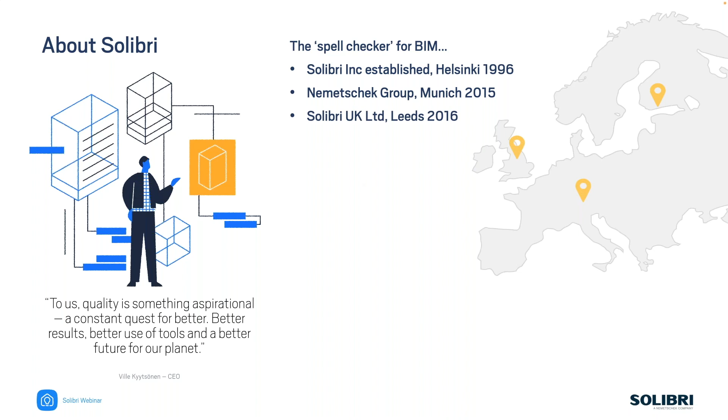In terms of the background of the company, Solibri, the main company that started it all off way back last century, is based in Helsinki. We became part of the Nemetschek group in 2015, and specifically the UK here, we became a full-on subsidiary in 2016, although we existed as an entity before then. Our head office is Helsinki, our UK office is Leeds, and as you'll probably be able to tell from our accents, myself and Simon, we're not from Yorkshire, but we are dotted about as an organisation all over the place.

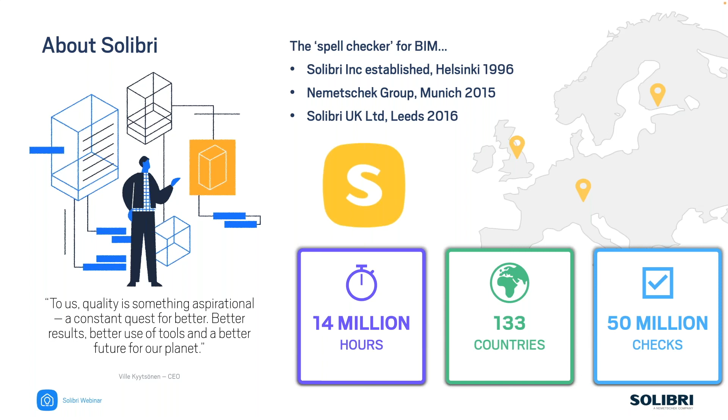Some of the basic stats: we're on track for an estimated 14 million hours usage of Solibri Office this year. Because we use a cloud licensing system, we know from those statistics that the software is in use in 133 countries, and we're estimating something like 50 million checks to be carried out. So there's some fairly big numbers.

In terms of the product family, we talk about Solibri. There is only one piece of software called Solibri. The license that you have, whether it's a subscription, a solo, a Teams, a network license, whatever it is, determines what you can actually use, whether that's Solibri Office, Solibri Site, or if it's the viewer, which is just the Anywhere product. Today, because of what we're going to be looking at, we're specifically focusing on how we check models and how we customize rules, specifically for the fire stopping process. So for that, it is Solibri Office that we are talking about.

Just to set the scene of where this sits in the workflow: typical workflow in Solibri always starts with IFC, and typically what we do is bring those together, usually multiple IFCs, to combine and create a federated model. That creates our SMC project, and then the key stages here are we can take that project and organize it into the way we want it, whether that's through classifications or just physically coordinating the models in different ways. But what we come on to from that point is checking.

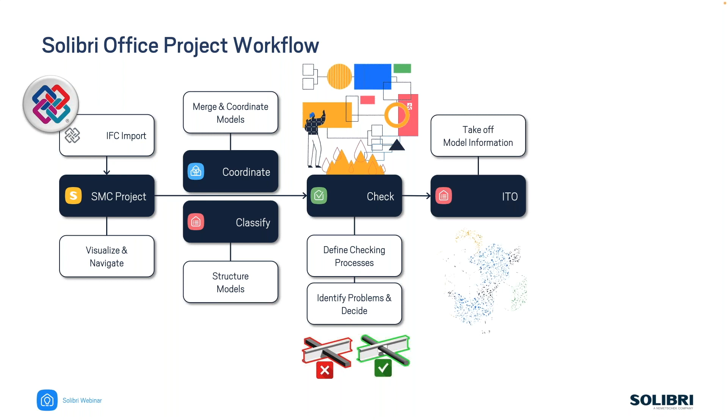We check what's in the model, and this is where we'll be focused today on the whole fire stopping side of things. So we want to identify any problems, decide what's going to be done with them, and then pass them on. Once we have a reliable model, then we can talk about information takeoff and how we can take data from the model. That's not really what we're looking at today, but the final stage is once we have checked the model and identified any issues, we have to communicate those.

So we need to share those with others, and typically what we're trying to do is do that with BCF, BIM Collaboration Format. It's an open source format, and the beauty of that is we can plug straight into most of the common authoring tools. That means we can quite quickly get some updated models returned, which plug back into the system and give us a nice closed loop so we can repeat this process, because we don't just do it once and have a finished model and everything's perfect.

Sadly, as I'm sure many of you will have experienced, it's never quite perfect. As I said though, today we are focused on this area here, which is the checking part of the process.

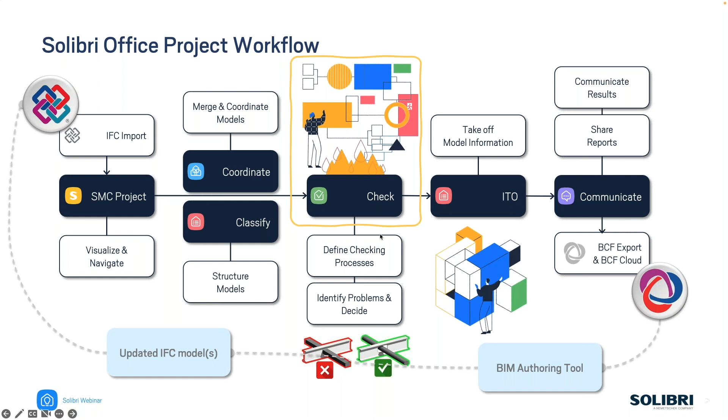So coming now on to the more specific stuff, the solutions and fire stopping side of things, we've developed a team in the UK looking at providing bespoke solutions. We have our own development team and we've partnered with strategic industry partners to create tailored solutions for Solibri. These range from simple things like checking names conform to ISO 19650, to creating custom checks like the stud opening check, which creates pseudo components to check things not normally possible since components aren't actually modeled. We can do detailed stuff like that, right up to complete projects such as this fire stopping project we're looking at here.

These solutions will be free to customers with a valid maintenance agreement, developed primarily for the UK but usable elsewhere with some tweaking for localized standards. What we're looking at today, fire stopping, is part of our BIM Coordination Plus library. The solutions we're developing fall into 5 main headings. BIM Coordination Plus will include the first couple of items, but we're also looking at others that are discipline specific or generic, regulations or standards like ISO 19650, and sustainability.

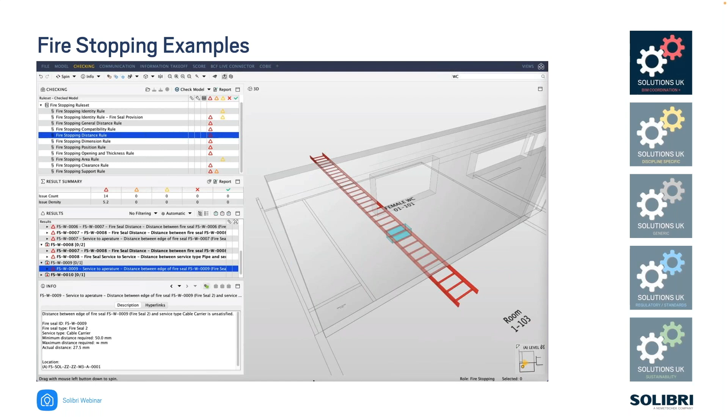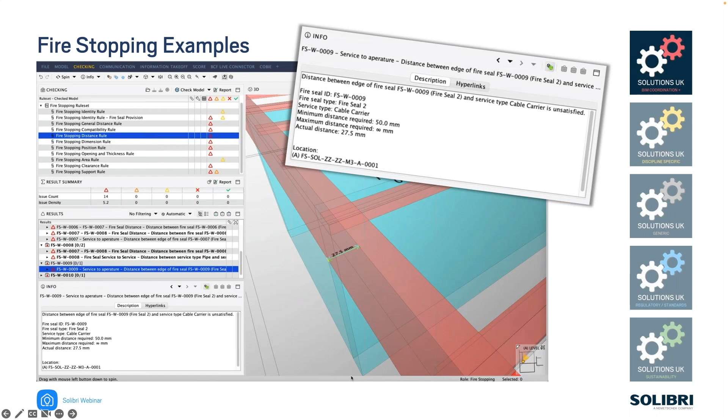Back to the fire stopping side of things as part of our BIM Coordination Plus, these are just some examples of what we can do. You can see we have the fire stopping rule set, and the results have been organised in a particular way. In this example we're looking at something that looks like a ladder - it's a cable tray. If we look closer, we can see that cable tray is actually too close to the edge of the opening it's passing through. Looking at the info itself, we've formatted this in a nice presentable way to make it clear what the actual problem is, and this can be reported off the back as well.

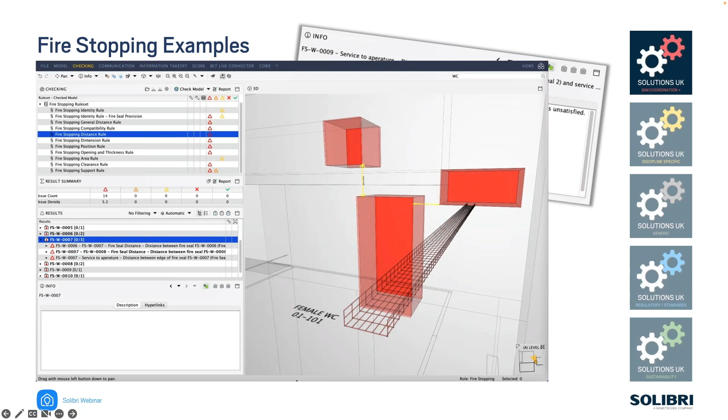Some other examples - you'll see we've broken these down and organised them by the fire seal instance ID, and what we can then do is present the various bits of info at the bottom. Simon will go into more detail on that. In this example we've also tried to group them together by this fire seal instance ID, just to give a logical approach to how we present that information. You can see all 3 issues are grouped into one item to make it easier to report and move on. But enough about me.

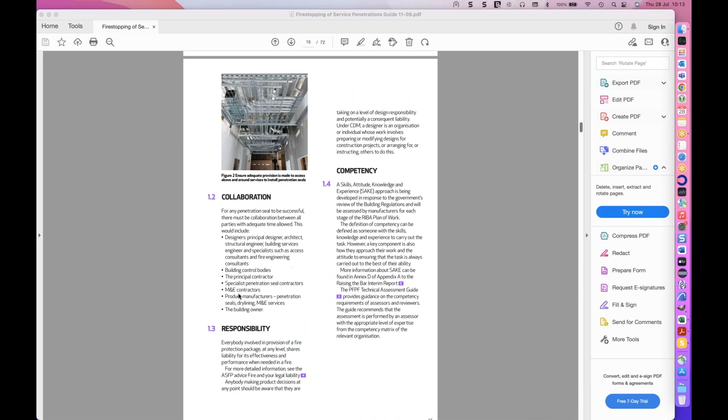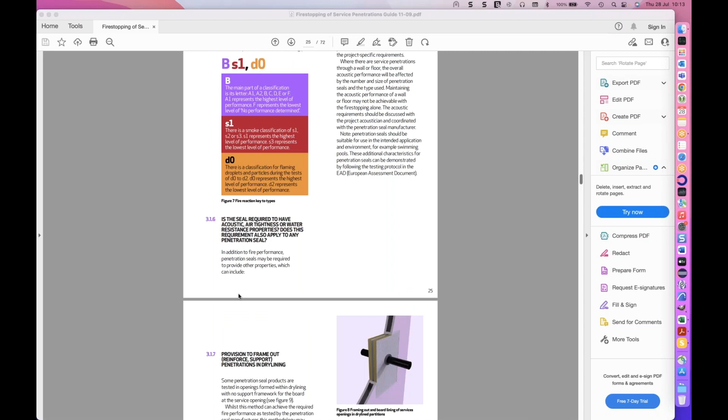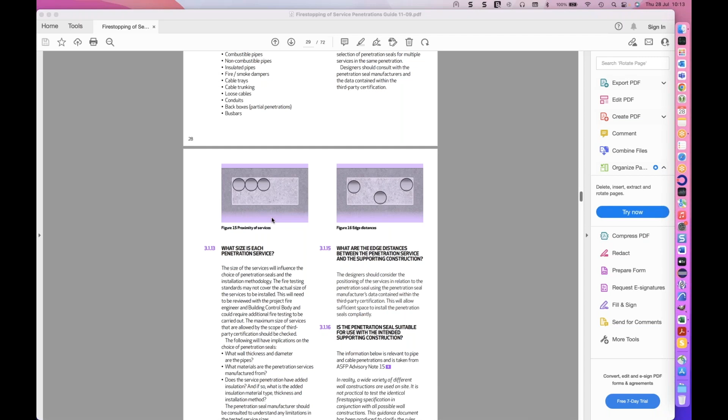Which is all about the spatial functionality for checking this. So it's looking at analyzing all the supporting construction, the positions and sizes of the penetration seals, the proximity to each other, and the positions of the services within those seals, either to the seal itself or to each other. That's the functionality we've been concentrating on.

So what I'll do now is close down the Acrobat Reader here. What we'll do is go into Solibri. I've just set up a ruleset with my fire stopping rule set, and I've got a couple of classifications that are used within the solution. So in here, I'm just going to open up my three models.

So the architectural model, a mechanical model, and a structural model. We'll open those up, and as good practice, as we always do, we'll give those short names so we can understand when we receive any kind of issues, we can see what components are from which models. I'll set those disciplines up so the rules can find the data correctly. So that's something relatively simple.

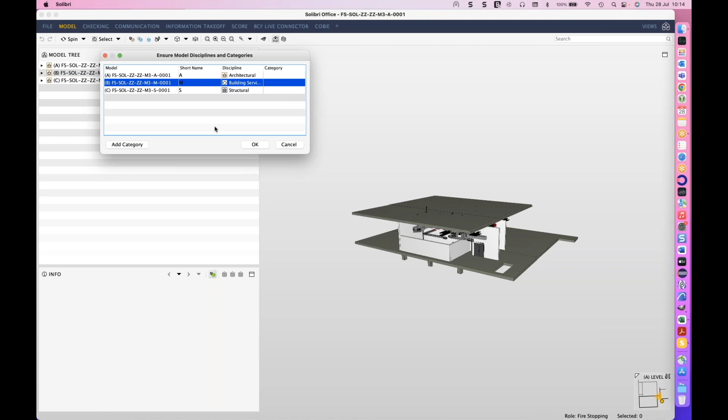So the model itself is just a very basic outline of a few walls, basically with some services going through them.

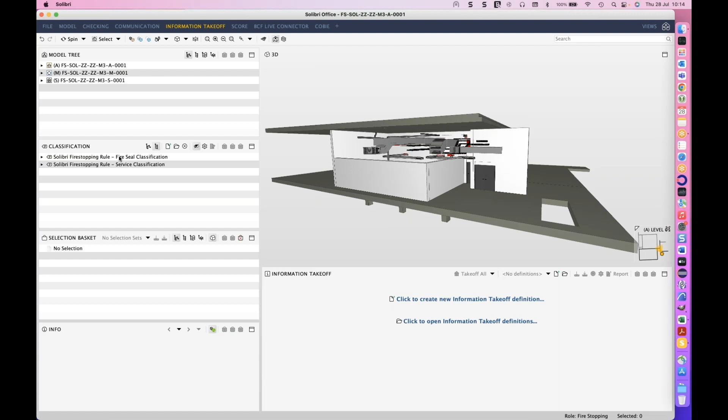If we go to the information takeoff tab, first of all, where the classification is generally found in the Solibri interface, we have two classifications which primarily drive the fire stopping solution. In this example they are very generic, but in real life scenarios they will be more granular. When we look at the fire seal classifications here, we can see we've got Fire Seals 1 and 2, done by position within the wall.

But realistically these fire seals, at an early stage, might just be the BWICs. At later stages they may be standard test condition IDs, such as for manufacturers like Rockwool and Hilti and those types of people. So I wouldn't expect to see Fire Seal 1 and 2 in here - I'd expect to see things like RW SW145 or whatever, the standard detailing reference for a particular condition. So in this situation, I'm just going to classify one of them slightly differently.

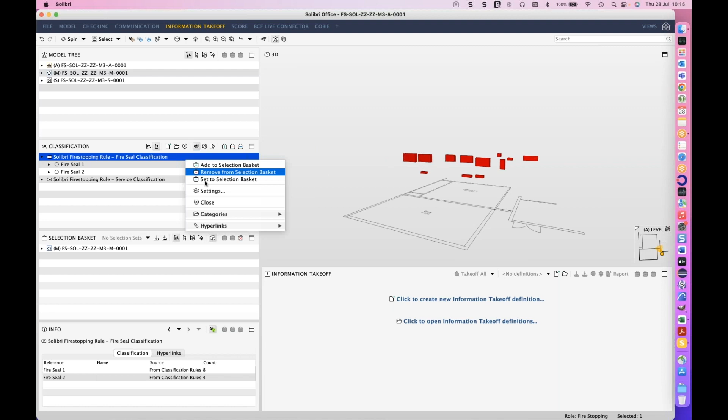I'm just going to set this up so we've got a Fire Seal 3 as well. So all I'm doing here is - let me just grab that a second - classified components, there we go. So we'll set this one to Fire Seal 3.

So now we've got these different classifications of fire seals. This controls basically the actual fire seals, the BWICs, or the openings in the model. We can run the vast majority of these rules based upon different stages of the project, and I'll come to that with the rules themselves.

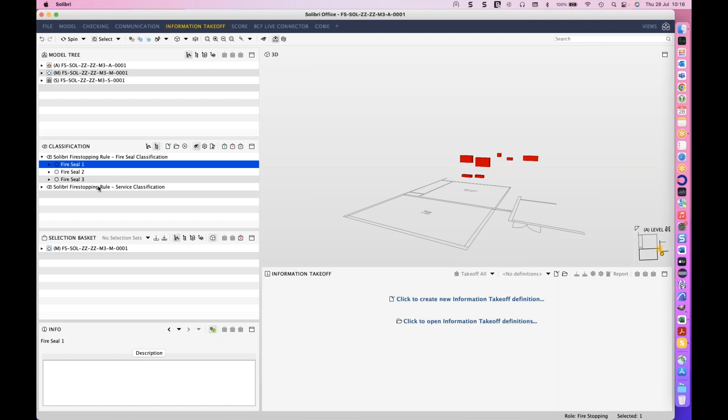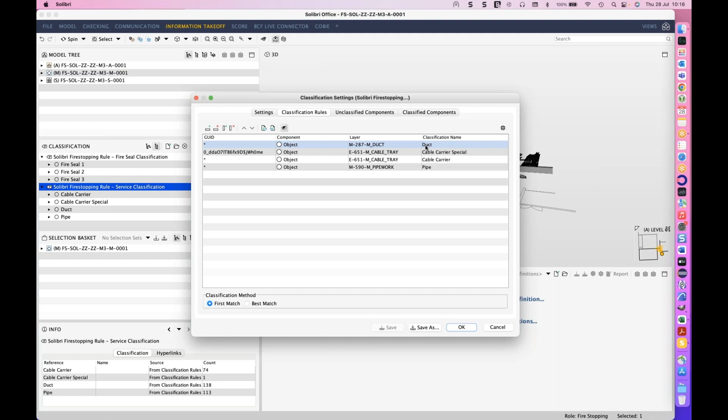The other part of it is a service classification, and I must stress here that what you'd expect to see is a categorization of things like copper pipes, plastic pipes less than 160 mil, or that type of thing. You'd use the relevant fields in the classification, such as pipe diameters, to classify the types of components as you'd expect them to be, so that when looking at the fire seal standard details, we can apply that through to the types of services as well. In this case it's just showing the functionality, but you'd break that down to a much higher degree of granularity.

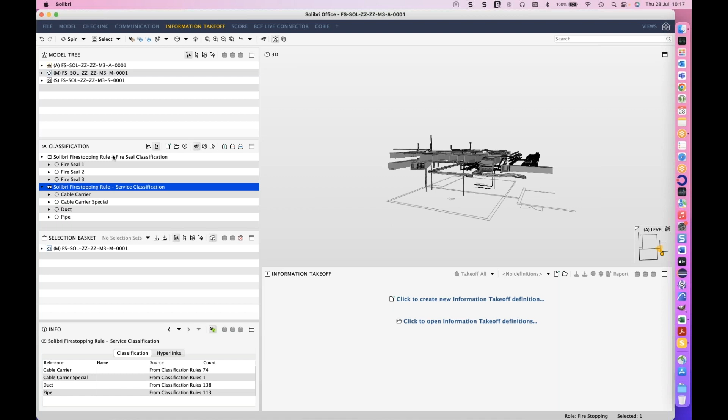So once we've got those two bits of data, what we've got in our checking area is a whole host of rules which enable us to step through the types of checks you might want to carry out when analyzing the fire stopping within a building.

The first one is really the identity rule, and the whole purpose of it is to identify where we have penetrations through compartmentation walls and floors. So let's run the check at the moment - we'll run it and let it go away and do its thing.

When we click on the identity rule, what it does is go through and you have to specify the walls and floors which are compartmentation walls and floors. Then we can specify a value here, which is floor distance, and I'll explain that in a minute. We can then specify whether to include any of the fire stopping services, defined as anything we've classified within this rule. So relatively simple filters really that are used within Solibri.

The floor distance is so that if we have panelized systems or elements that might have pseudo holes in them - for instance, if you're modeling in Revit and you had a panelized floor system and punched a hole in it by editing the objects, you'll find there's no physical voids there. There's a physical void, but not a void object that would clash with services. So we look at those panelized systems, and if they're grouped together or butted with gaps where services might go through, we look at a distance for another part of the floor, generate a pseudo object, and check whether the services penetrate through that.

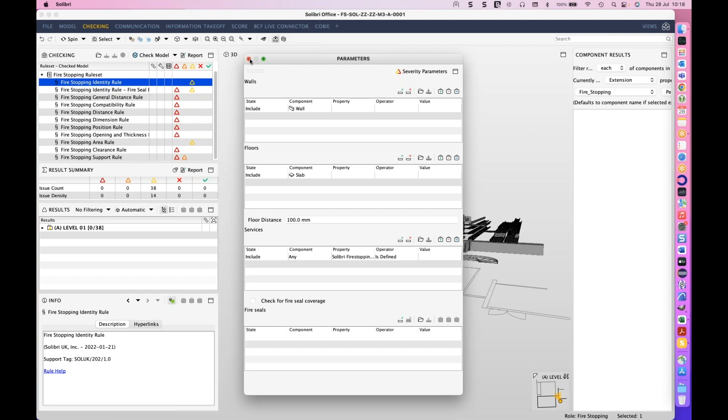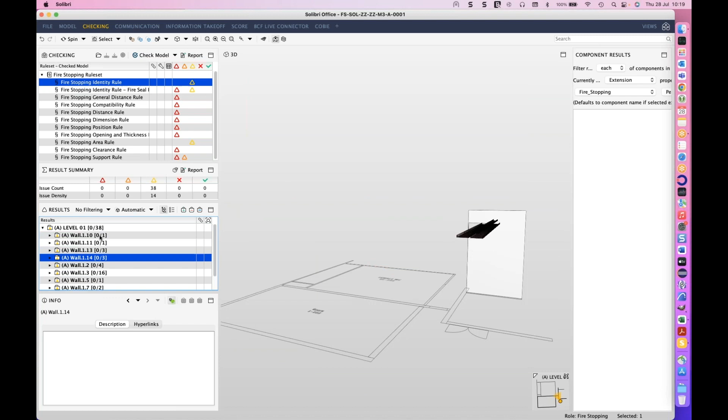We've done a lot of work here to make sure we don't miss any services - that's the key thing. The outcome of the rule shows by level the number of penetrations per wall type. So as we click on these walls, it shows us how many penetrations - we've got 3 in this one, 3 in that one, 4 in this wall, 16 in this one, and so on.

And when we get down to the slabs, you can see we've got 3 in that one. You can individually go into each of these items if you want to. The key part is if we go back to this wall with 16 items in it, we've also tried to keep the position of these relative to each of the services. What we don't want is for each issue, when you click on them, to jump from one side of the wall to the other. If we're planning BWICs in a model, we might want to start grouping them - you can see it steps through the wall based on its X position, so we're getting a more logical breakdown.

So for instance, if we've got these 2 pipes here and wanted to create a BWIC for it as an instruction, we could collate those 2 together and say these ones need a BWIC around them for planning purposes.

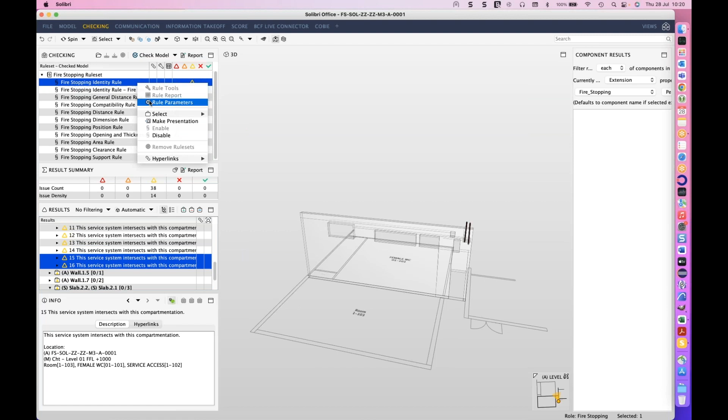Bear in mind this rule has another option, which is checking for fire seal coverage. This could be checking that you've got a BWIC assigned to these services, or the physical opening that's been punched into the walls or floors, or the actual fire stopping component we might want to check. At each stage, we could go and check whether there's a definition of those components in the model.

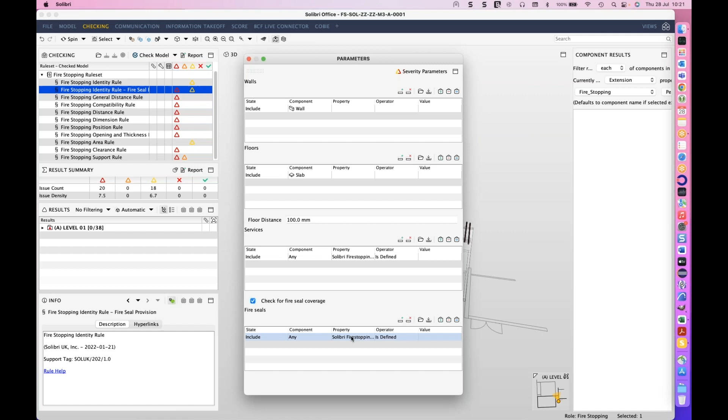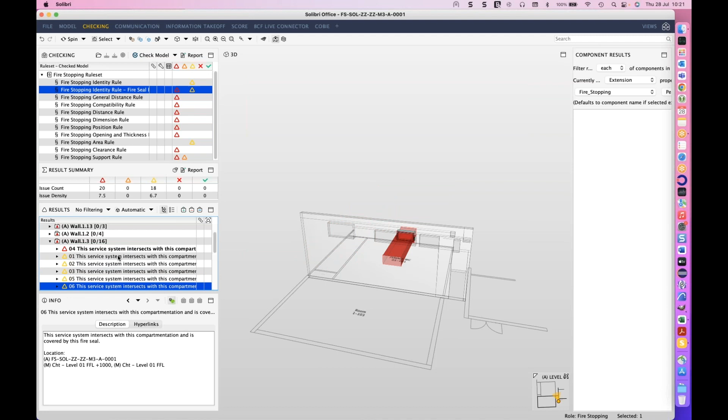For instance, in the next version of the model, just tick that item. All I've done here is tick the box and specify the fire seals from that classification - all of them. That gives you the same list of data, and if we go back to that same wall with 16 issues, the yellow issues are indicating that we're okay with these, and the blue objects are the actual fire seal components, so it has been addressed - each one of these has been addressed.

Whereas if we go to the top one here, you'll see we don't have a blue object, which is the fire seal component. So the idea is this ensures not only that we've identified all the penetrations within the compartmentation walls, but also that we've addressed them with components to make sure they're actually being looked at. That's really the identity rule - that's our first rule. Although we've got 2 here, it's the same rule, just with the option checked to verify whether we've actually addressed those issues. Again, we can use these at different stages of the project, which is useful.

Then we move on to the other rules in this list, and the other rules actually use an Excel spreadsheet to drive the functionality.

So the Excel spreadsheet in the background can be used externally to set up and then drive the actual results inside Solibri.

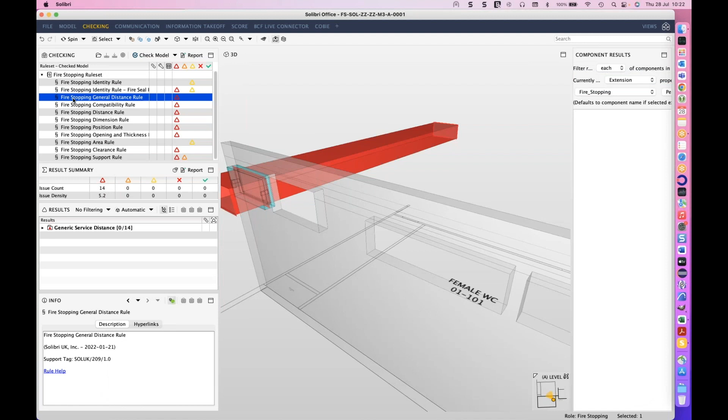So if I go to my Excel sheet here, we're looking at this service distance, this general distance rule. The rule basically says go and check the walls and slabs. We'd have to specify they're the fire compartmentation ones, but not in this case here, we're just checking all walls.

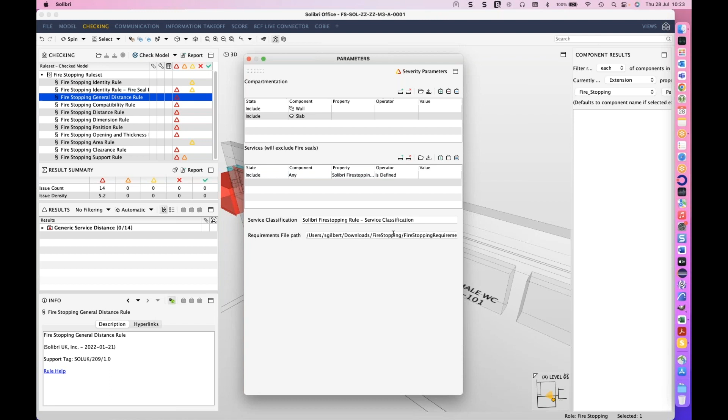But this is just standard filtering functionality that you must configure inside Solibri. Then we would specify the services again, and down here we put the service classification in, and then the requirements file path. The requirements file path points at this Excel spreadsheet, and here we can put in our services and specify the distance to the same service. I've just put 300 in here.

We wouldn't normally use 300, but it just shows the process here. And then you can do a distance with a different service type, so not the same service type as what we're specifying. We can do that.

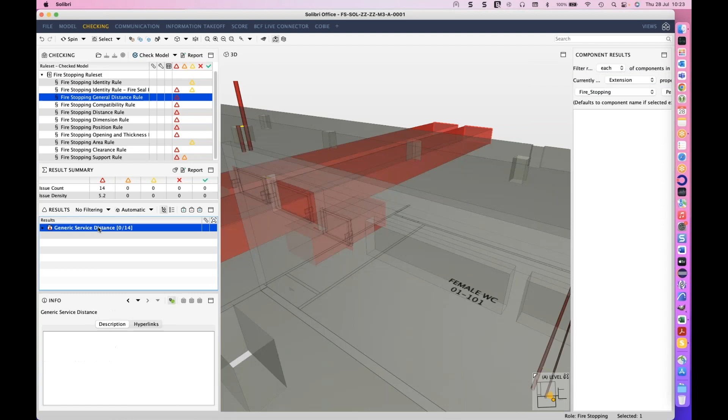Now the issue category is used within the rule outcome as well, within the rule results, as the categories, and you'll see that in the results area. So when we run that rule, what we've now got is these generic service distance checks. This is really very basic - making sure that we haven't got certain elements within a certain distance of each other that might cause us problems later on down the line.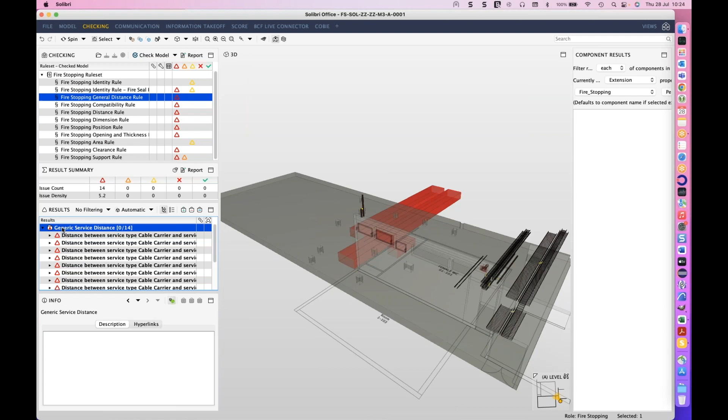So it's a very granular check here, a very outline stage where we might not have BWICs in there or anything else. It's just saying give us some kind of idea of any kind of problems. Now you notice it's using generic service distance, and when we double click on it, it takes us to those relevant components and measures the distances between them wherever it doesn't conform to it.

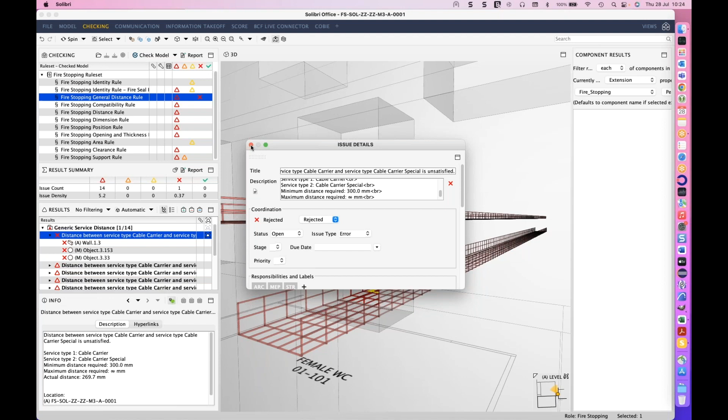Now again, down here it will specify the service type 1 and 2, and it then sets the minimum distance and tells you what you've actually got here. So what we're trying to do with all the rule results is make them clear so that if we create an issue, what we get in the actual description is basically that information, so we don't have to start creating any of that data manually within the rules.

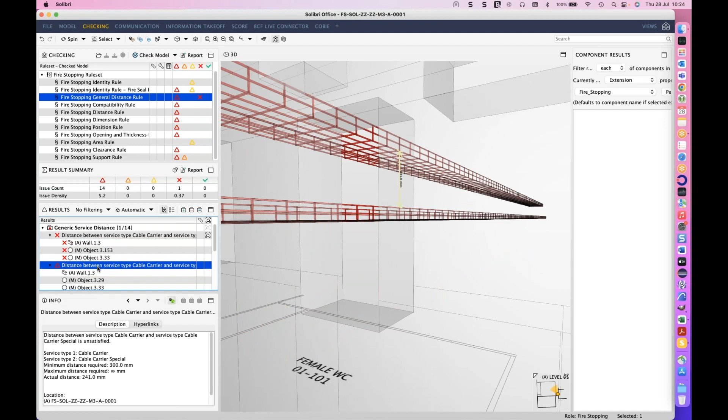And later on, when we have the IDs for the penetrations, for the fire seals, then we will use the ID for the components to list the data. So that's the general distance rule here - it just literally goes away and checks the distances between certain service components, and it will do that across the board, relevant to whatever we've got selected.

Now the compatibility rule, which is the next one, looks at the service compatibility here. So it needs to have a fire seal or an opening or something that's been defined. What we're doing is checking the services that are going through a singular fire seal, and the whole idea is it might be that you don't allow dampers to be in with any other type of material in this case, or a different type of service.

So in this case here, we've got some wildcards that we use in the spreadsheet. First of all, we have the service, and then we have the compatible service types. If we don't put a value in, then basically it must be on its own. If we put a value in, we can specify a functionality saying that ducts can only have other ducts with them, and you put semicolons in between them. A star is the same as anything else inside Solibri - it's a wildcard for any object - and then there's a double dash, double hyphen, which means anything but.

So this is like - I can have ducts but nothing else, if that makes sense. And then if we do pipes and put a star, generally speaking here, it was saying that pipes can be put in with anything.

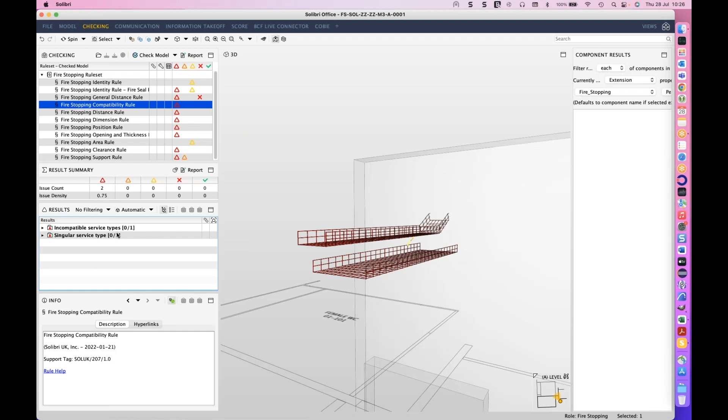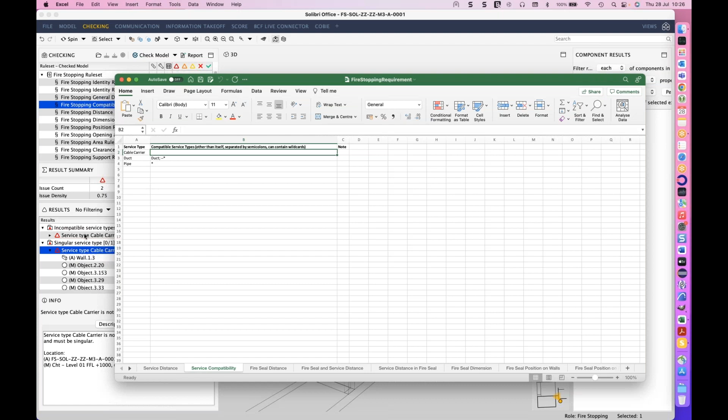So again, the idea is for you to spot where you may have actual problems in the model. We've got incompatible service types, where basically we've got a cable carrier special with cable carriers, and then we've got a singular service type, which is, as you see here, the cable carrier must be on its own, because in our spreadsheet we didn't put a value in at the top here. So what we can do is highlight where we might have incompatible services with each other going through the same fire seal itself.

So again, very quick rules for you to identify some basic fundamental things that shouldn't happen. Then we move on to really the crux of the rule, which is our distance rule. This rule uses 3 tabs on this spreadsheet. The first one is the fire seal distances. So we've just put fire seal star in here, meaning any of the fire seals.

You could just put a star in there and it would cover all of it. And then we're saying each fire seal must be 300 millimeters away from each other, and we've got the fire seal distance as the category value for it. So you can put your own category values in, and it will change what's going on in the results.

On top of that, this rule also checks within the same fire seal, and looks at the allowed service types that you're putting in there. So, for instance, if this was a manufacturer's detail test condition, you can put the test condition in, specify the types of services that should be allowed in there, and then the distance from those services to the actual edges of the fire seal itself, so to the aperture of it basically.

So we've got a minimum, we've got a maximum value as well, which can be used to make sure we're not too much distance around, say, circular pipes where they're in a single opening, so a circular opening. And again, we've named this service to aperture.

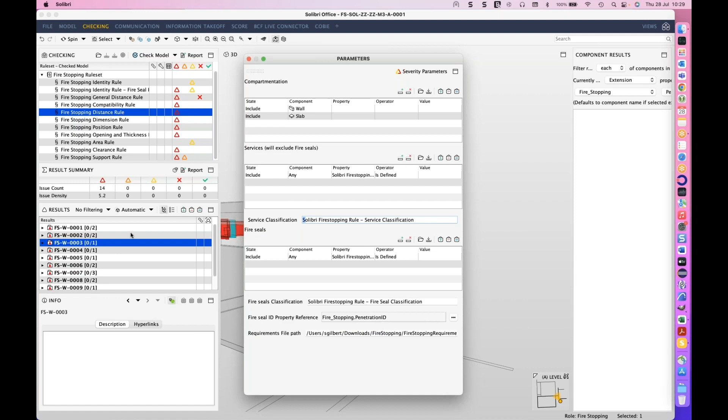And then because now we're using fire seals or BWICs or whatever, what we can do is put the ID in, so we categorize the results by the ID. So what we're now looking at is the fire stopping penetration ID in this case. That means that when we run the rules, the results will be categorized by those fire stopping penetration IDs.

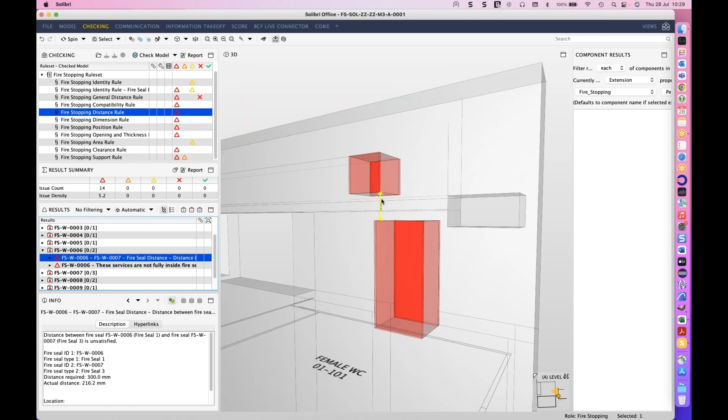So if we go and have a look at this condition, first of all you'll notice that we got a fire stopping penetration ID of FSW006, for instance. And what it's actually showing here is the distance between 6 and 7, between these two, doesn't conform to the 300 mil that we actually require between the fire seals.

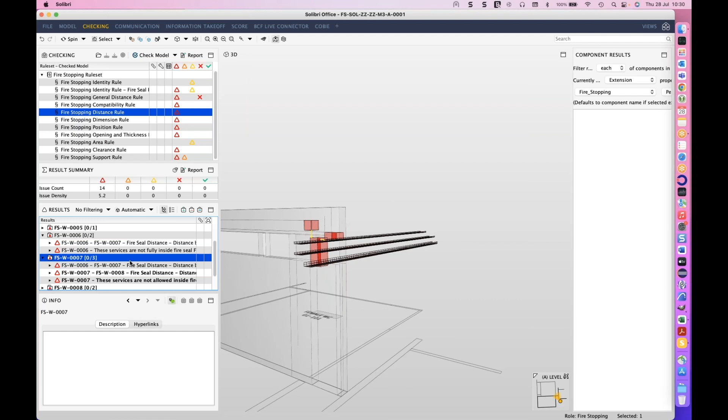On top of that, it's also got another issue to do with that one fire seal here. So there are 2 issues with this one fire seal, saying these are not fully within the fire seal itself. So we're checking the full compatibility of whether or not they physically go through the fire seal. Because we have the next fire seal, which is number 7, which is part of the same issue, you'll notice that when we select this one, it also highlights the issue above it.

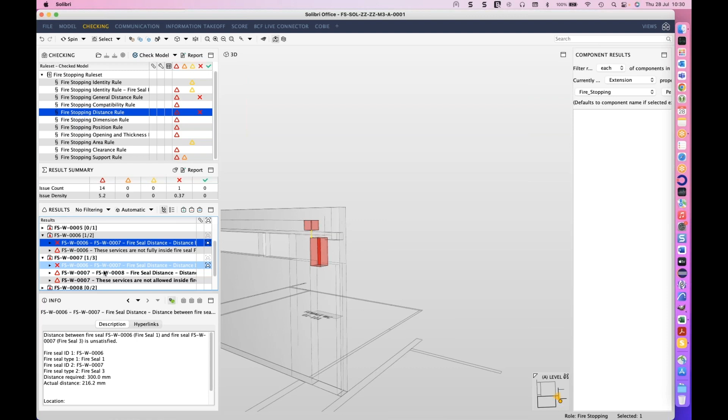So if we create an issue at this level, it creates it for both of those. So we don't have to then go and find the same issue twice. If you've already created an issue for that condition between these two, it recognizes it within the rules. So we're trying to be as intelligent as possible, not only with the categorization, but the way that the rules actually work as well. And again, we've got this fire seal distance to this other fire seal.

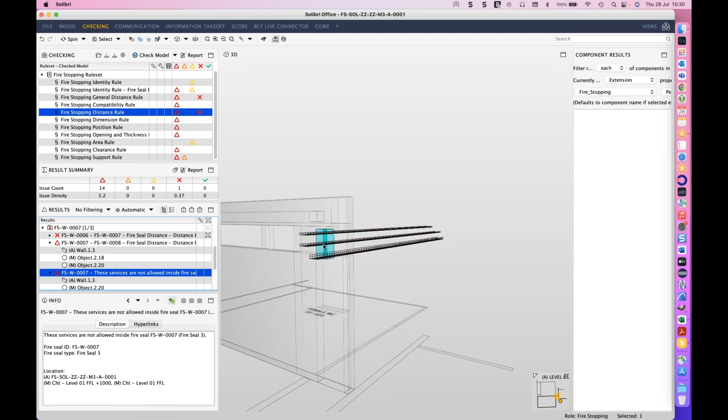Again, we've got services that are not allowed in this fire seal - this was fire seal 3. In our definition here, we said that in fire seal, we've got to have pipes in here, and you can see we've got cable trays, cable ladders, and obviously they're not allowed within that. So it's telling us these are not allowed within the fire seal itself, breaking it down per fire seal as far as the types of issues we've got.

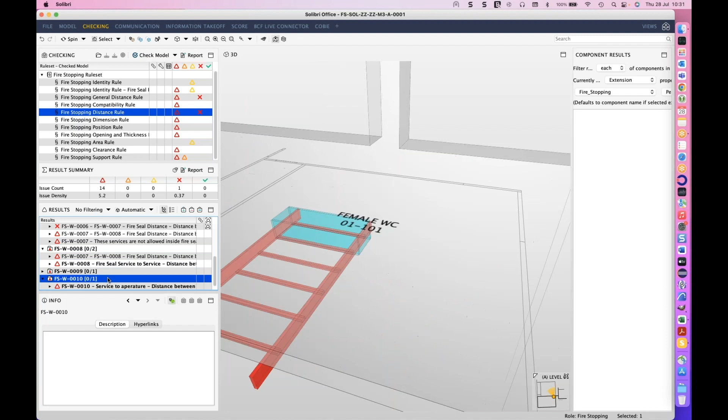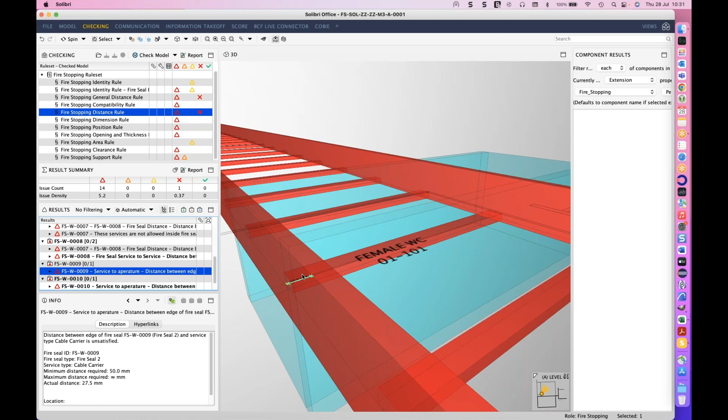Service to service distances are catered for, as well as the distance between the fire seals. If we go down to the example we saw earlier, let's take this one here - you'll see we've got this cable ladder, and if we select it, it's telling us the fire seal ID is 009. The type of fire seal is fire seal 2, so this would be our manufacturer's ID. We'd say the cable carrier is going through it, the minimum distance to the edge is 50 mil, and we haven't put a maximum in, so it goes to infinity. Then you've got an actual distance here, which is 27.5, so you can see it's actually measuring it to the edge of that fire seal component. That's the way our distance rule works.

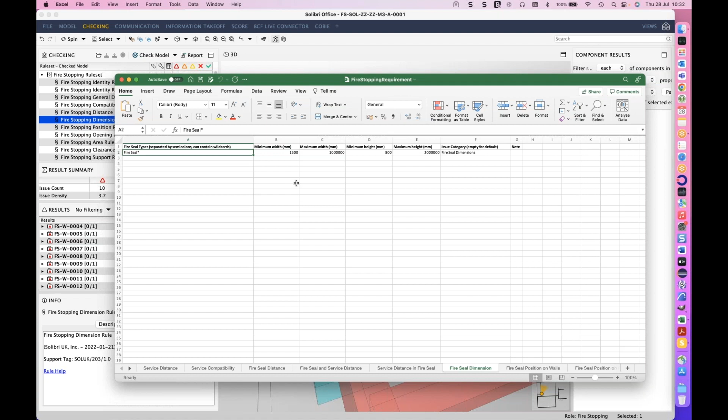We can then look at some of the other functionality here. If we look at the dimension rule, it looks at the fire seal dimensions - this is like looking at manufacturer information as far as minimum, maximum sizes of, say, the ablative batts and that type of thing, so height and width dimensions of these components. This will then tell us whether or not they conform to the size requirements we put in the spreadsheet. So again, relatively simple - it's just looking at the component we've got classified against that set of requirements.

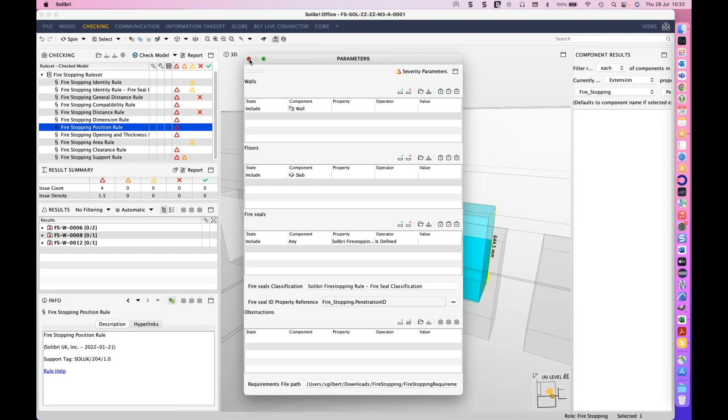Moving on, we're then moving on to the position rule. The position rule here has a little bit more complexity to it. What we have here is the walls and the floors, the fire seals that are there, and then we also have the fire seal ID, but then we have obstructions in here. The obstructions really are for - what we're doing with the position rule is we're checking the manufacturer's position within a wall component or a floor component where it's deemed to be approved by the manufacturers, how it sits in the wall.

Now this is using this position in the walls tab. Again, we have our fire seals, and then we can actually set the distance to the side compartmentation, so we can have a minimum and an offset from that as well. And then we can also do a distance to the top compartmentation. If I've put in 400 here, if we put 300 in, it would pass. The whole idea with the top compartmentation is that this fire seal, as a manufactured ID, might actually be either a drop head condition or a regular condition, and in which case we might want to test whether or not we're putting a drop head condition into a regular fire seal, or a regular condition into a drop head condition. So to actually check that we've got a minimum value above that is important.

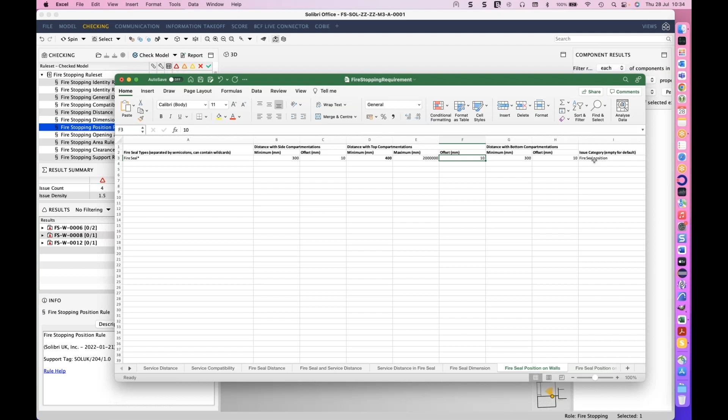We can also set an offset, so rather than tracing up the wall directly, we can give it a small offset to detect any kind of components. We've also got the distance to the bottom of the compartmentation as well, and we've called this fire seal position. What this does is it will go away and find the positions of those elements. So we've got an issue with the side of this fire seal with this internal wall here. What we're saying is we require 300 millimeters around the outside of that, and you can see it's finding this wall - this is not deemed appropriate by the manufacturer as far as its physical location within the wall structure.

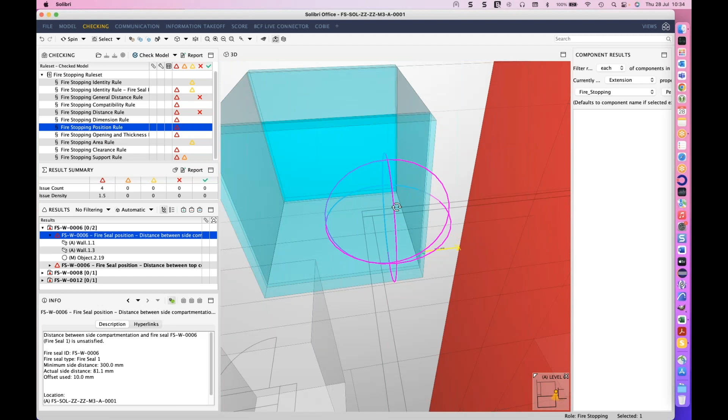And then on top of that, we're not really conforming to that header condition, where we might be looking at whether it's a drop head condition - you see this is 374.5 rather than the 400 millimeters. So the idea here is that if you have put those fire seals in and you're specifying that they are either drop head or regular, you can then check to see whether or not it would still conform to them. That's the idea behind the position within the wall type of checks.

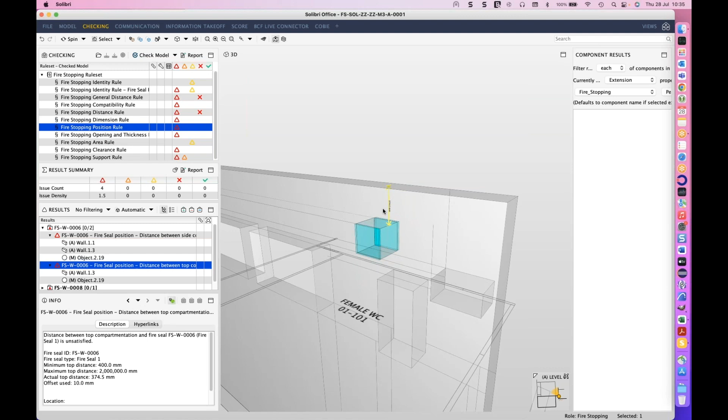So we'll move on to the next one. Let me just take that off so it isn't highlighted in the same way. The next one really looks at the fire stopping opening and thicknesses.

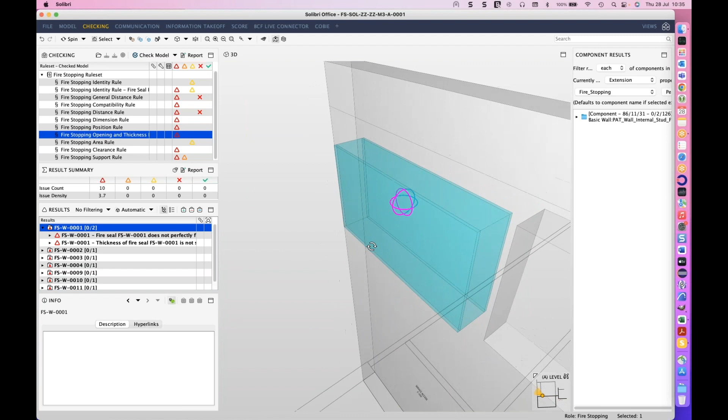So we move on now to a situation where we have a fire stopping component in the wall, and there's an opening. What we want to ensure is that the edges of the fire seal touch perfectly the edges of the opening itself, so there's no gaps between them. It's 0 millimeters basically, so it's fully enclosed within that area.

Just to mention something I forgot to mention about the distance rule - Solibri has a clash detection rule with a distance functionality. With our distance rule, when you saw those cable carriers with a distance value between the services, we're only checking the distance within the fire seal component itself. So we're narrowing that down to the bit we're focusing on, rather than distances across the whole element. There's a level of intelligence there that it's carrying out.

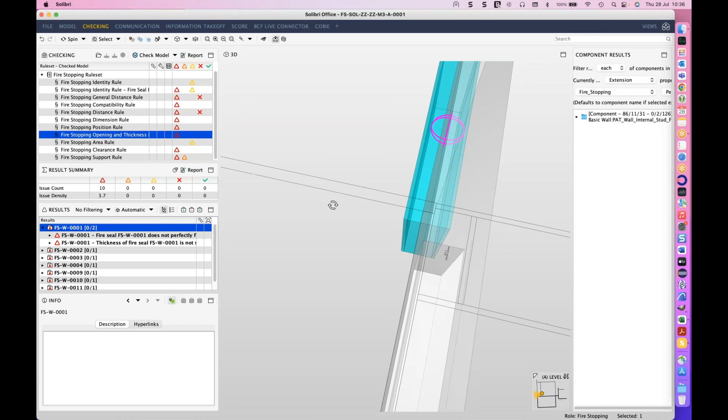So this rule checks whether or not it touches the edge of the actual fire seal correctly, and also checks that the fire seal thickness is at least the thickness of the wall, so it's not narrower than the wall itself. This one's not positioned in the wall correctly, so it's detecting that it's not correctly positioned within the wall. That's really the fire stopping opening and thickness functionality.

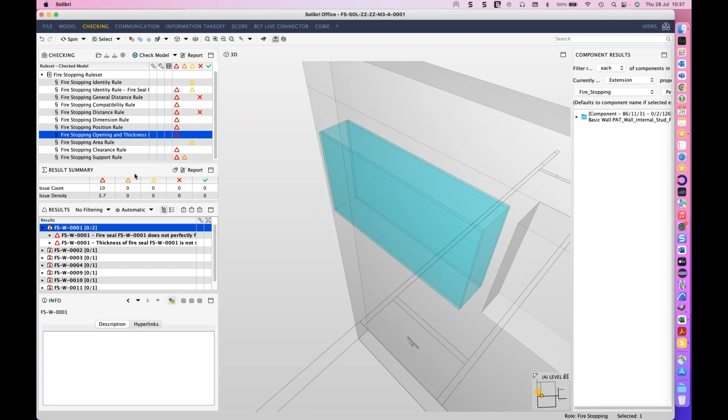We had a message, so just to show you, we actually look at the data that comes into our Solibri - I'm trying to think of the name of it now, you'll have to help me out, Ken - the online web portal that we use for Solibri customers. Solibri Society - I just had a bit of a blank moment there. On Solibri Society, we had a customer asking whether or not we could do certain things to do with materiality usage, and we picked it up from a support call as well.

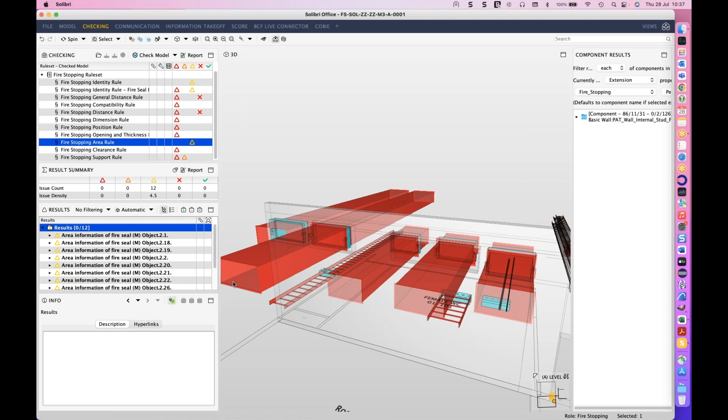What they wanted to generate is net to gross areas of those components. This rule will go away and tell us that - we haven't done anything with it yet, but theoretically we could start looking at material optimization or something like that. The idea is if we select this first component, you can see two dotted lines on the screen: the gross area here, and the net area. We can report those - we've got the gross area, which is 0.159, and the net area, 0.077.

What we need to do, which we haven't done yet, is make that available so you can push it through into an ITO, so you can list those. Then there's a possibility of looking at the cutouts and seeing whether you could optimize the usage of the materiality, to give advice on that point of view. Obviously the ablative batt materiality is quite expensive, so on a large project, given the amount of material you might use, some kind of optimization might be a good idea. But first, the first part of this was to work out the gross to net areas in that rule itself.

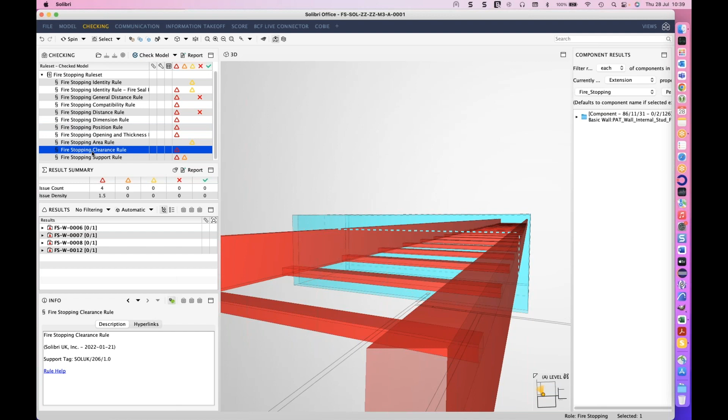On top of that, we also have a clearance rule. The position rule is all about the manufacturer-approved position within a wall, but that doesn't address the situation of actually physically installing these components. So the clearance rule is all about looking at the clearance you might need for a person to physically install it. We've got all the same details in our fire stopping ID, and we have functionality to say whether or not we've got inaccessible spaces.

So we can specify whether or not you would be able to - if you've got an inaccessible space, what we're saying is that it should be a single-sided installation rather than a double-sided installation. In that case, if we've got a space that means we can't install it from the other side, it only checks one side for the spatial requirements for a person to get in there to do that.

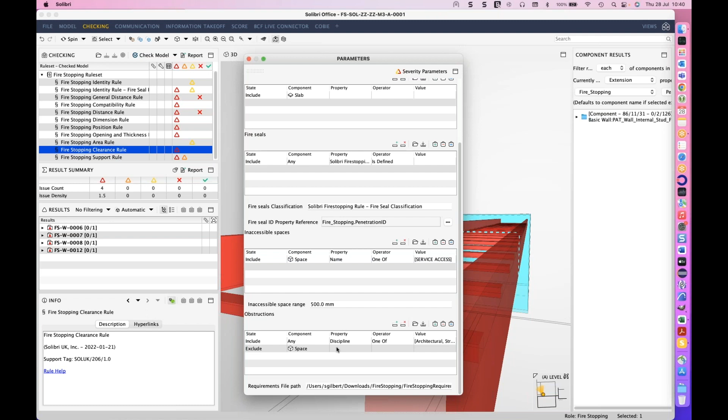And we can check for the distance for the relevant spaces here. So the whole idea of that one is it goes through, and I'll just take this example here. You can see that it puts a box around - we can define the size of the box above it and to the sides of it and the one in front of it, and we can also set an offset as well. So it might be that you want to position or change the sizes of these boxes, and again that's the position on the walls.

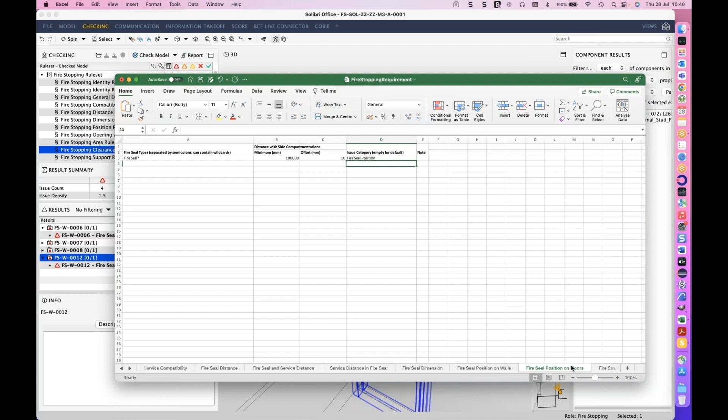We can then go to clearance. So the clearance here, again for the fire seals, we can actually set a side offset. So if we set that to 300 millimeters, we can set a top offset or a depth of it, and we can put in bottom tolerances, so we can account for pipes that go down the wall in front of it, but you'd still be able to get a step ladder in there. So maybe if you've got, say, 300 mil in front of it, you'd still be able to reach over that. And then we've got a bottom depth here, which we can also set to, say, 300 mil.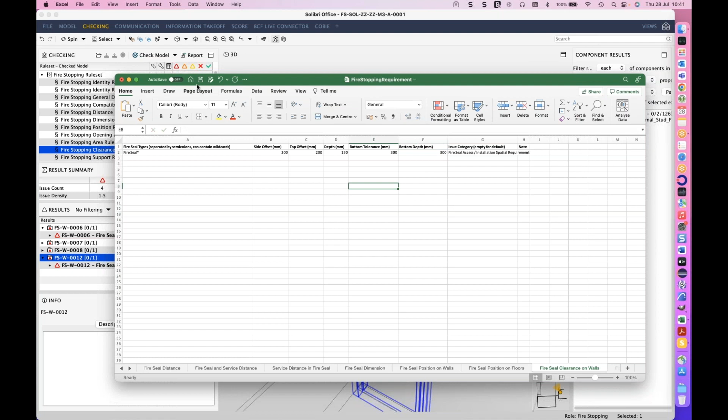So by changing the values in the spreadsheet and resaving it, we can make sure the rule reruns. You can do that by just making sure once they've run, you change one of the parameters and change it back, and it will rerun that rule for us. And we'll see that the definition is now picking up the fact that we've got a wall that's clashing with the sizes of those boxes.

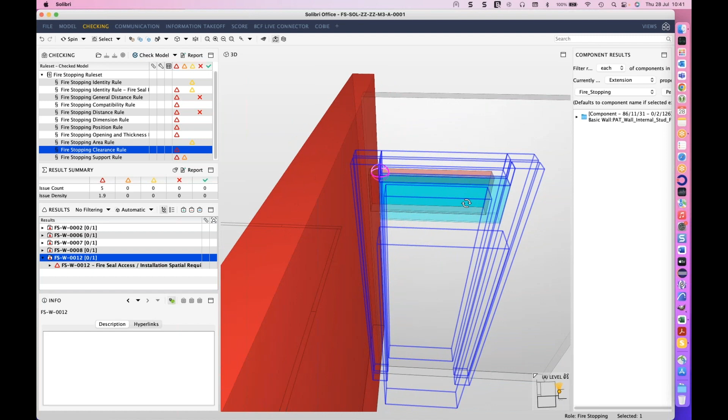And you can see here that the box, we've moved it away so that if there were services coming out and then downwards, you would still have this access area here that you might want a bigger depth in. So obviously you get a pair of step ladders or something like that. But the idea here is to get an idea of whether or not it would be easy to install or not, and that's what the clearance rule is all about.

And then finally, for our fire stopping rules, we actually have a support rule. Now, the support rule uses a further tab here, and we've obviously got those fire seal clearance for floors as well, in the same way. But the wall support basically goes through and checks the supporting wall construction, so it requires you to look at the fire seal IDs and the types of fire seals we've got, and what, generally speaking, is allowed in those fire seals.

So again, looking at manufacturer's information, configuring it for their typical details and the type of services allowed in there. And then down here we can start putting in requirements needed for that fire seal - it can be in a wall with a minimum or maximum value, between these two values. The idea is you can set the size of wall types they must be contained within. We can also set the fire rating, minimum and maximum. It also checks that we haven't got fire ratings that say 59 or 56 instead of 60 or 30 or whatever - so you've got a maximum and minimum range, and it will detect things that are over that as well.

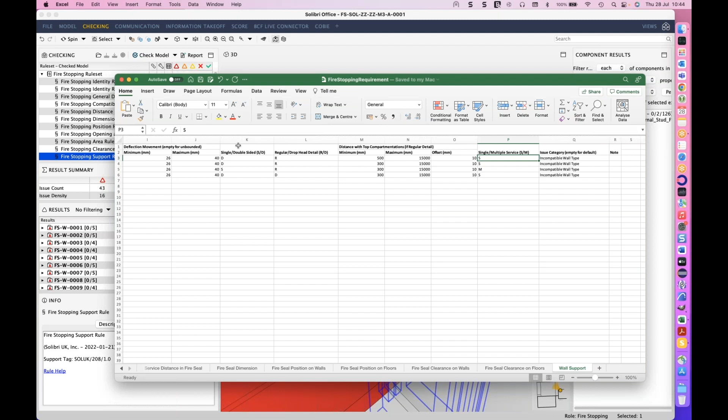And then we can put in our distance to the top compartmentation, so we can see whether or not it would pass or fail with an offset like before. And then we can also specify whether this is a single or multiple service fire seal type. So it goes through and checks all these conditions - the rule itself uses the values in the sheet there. What we do is specify the walls here, and then we can specify the parameters we're going to use for, say, the thickness of the wall.

So in this case here, we use the base quantities and the width value. Again, fire ratings—what we're actually doing is picking the actual properties from the walls. Now, I haven't given it a deflection movement value, and we'll see what goes wrong there. We've also got the services being specified, and the fire seals being specified.

If we go down a bit further, we've got the fire seal ID, and then we have our inaccessible spaces. So what this is doing in the background is, if you put in a single-sided or double-sided item here, it will go and check that both sides are able to be accessed to install that fire seal.

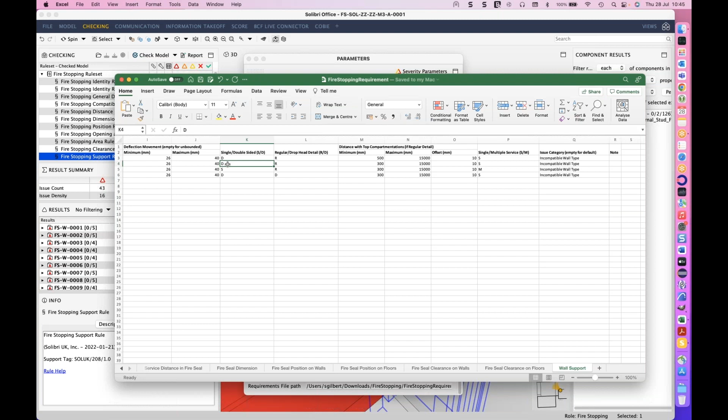So what we're doing is specifying which spaces are inaccessible, and if we have a value in there that's inaccessible, it will then highlight it for you and check either side of it. We can also set the space range that it projects from the fire seal into the actual room, either side, to search for a space.

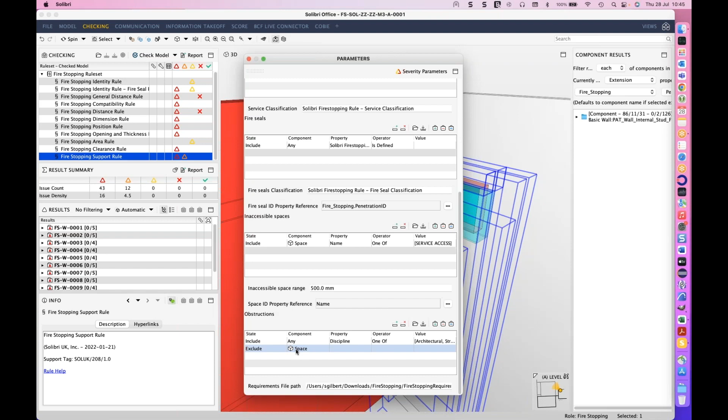And in this case here, the obstructions that I might want to use for the drop head kind of condition that's in there, I can put in what elements that I don't want. So in this case, I'm saying anything from the architectural and structural model, but exclude any spaces, because I don't want it clashing with spaces.

So that rule then goes through, and in this case you can see that it gives us 5 types of issues to do with this rule. We've got the acoustic rating that's not being conformed to, and again it tells you the fire seal ID, which is the individual instance. It tells us the fire seal type, what service is going through it, what the minimum and maximum values you put in there are, and then the actual acoustic rating. So it might be more or less than it, but it has to fall between the two values, and it will tell you why it's failed.

Again, the fire rating, very similar in this case. We just put the values in at 90, and it's saying the actual rating is 120.

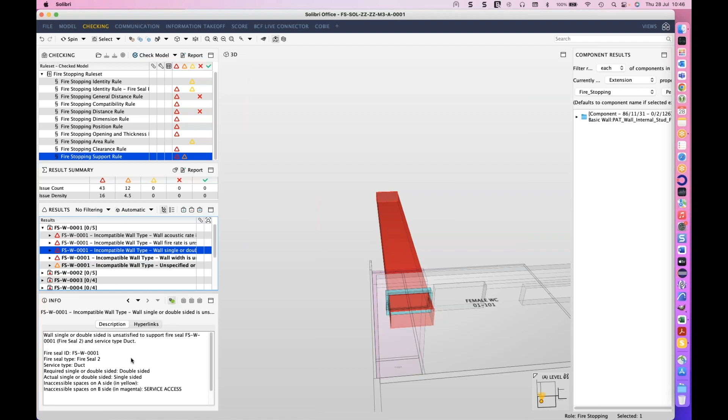This was the single or double-sided check. So in this case you can see on the model itself that it's required whether it's single or double-sided—this one's double-sided because it was a D. The actual single or double-sided check found that it's single-sided. What we then highlight on one side, the A side, in yellow, is the relevant spaces that would make it an inaccessible space. The service access space here is coloured in magenta, showing that you could install it from this side but couldn't get on the other side.

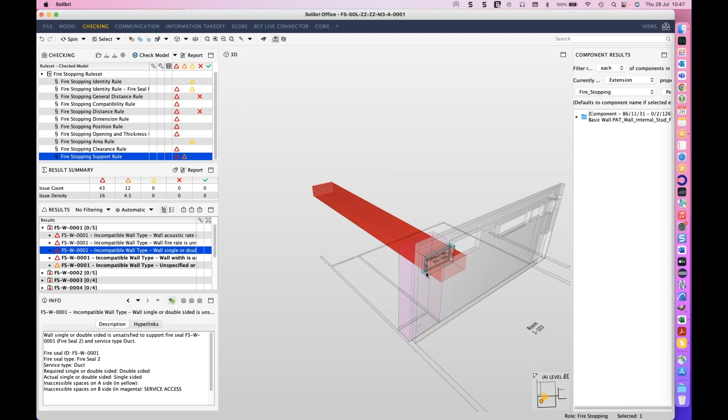And as the definition of this fire seal is a double-sided installation, we're able to track whether or not it can pick that up as well. Again, wall width—checking the wall width is between the relevant values or what it's designed to actually work with—and then the deflection, which is saying unspecified value because we've not got a value in there.

So that's basically how that works with the fire stopping support rule. And that's our rule set as it is at the moment.

We will generate one more rule, which will generate a list of all of the fire seals, the services that go through them, and the data to do with the supporting wall construction, so that we can create a complete breakdown of that information as part of delivery for the golden thread data.

But I hope that's given you an insight into the substantial amount of work that's gone into that, and I have to thank the bodies that have been involved, especially Laing O'Rourke in this case, in helping us define these rules as you see on screen.

The original release will be a beta release as it pushes out, and we expect that with a lot of people testing this and seeing how it works, we might have a bit of extra work to do. But essentially, that's our fire stopping rules.

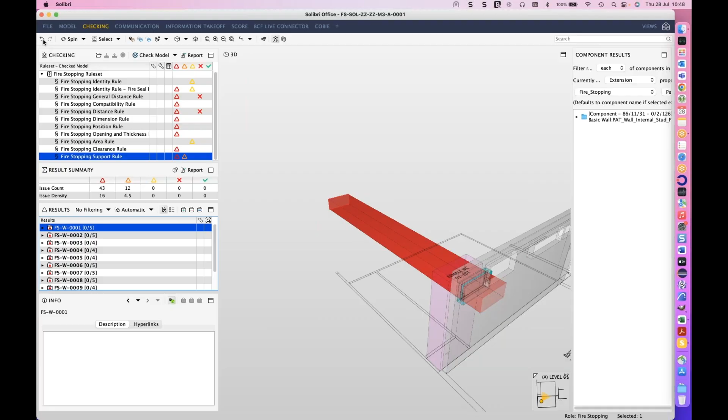There we go. Not as much to show on screen, but just to have something on screen.

So there's a couple of questions, one quite techie which I'll leave to you, and the other asking about being able to define this. We haven't released this publicly yet. The plan is to release it fairly soon as a beta release, with a final release going out a couple of months after that. This will go through as an extension on the Solution Center, so you'll be able to buy the free licenses there, and those can be assigned to users to enable them to install it inside the appropriate version of Solibri Office. It needs to be 9.12, 10 or later.

There's a question asking how this works with a BWIC, if the BWIC is modelled as an extruded route that goes through several walls rather than just an individual hole through the wall. We may have a few issues related to whether it will detect those other walls when looking at the position. We'd have to test that, but it should cope with the service distances correctly. It's a very good question, and if there's any models you have with multiple walls that the BWIC goes through, we'd be very interested in getting an example model. Please contact us so we can take that into account and see whether it's a problem, and if so, update it so it copes with those scenarios.